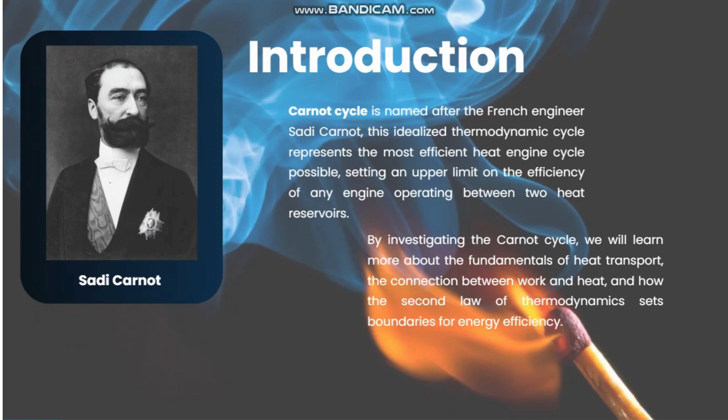Introduction. Carnot cycle is named after the French engineer Sadi Carnot. This idealized thermodynamic cycle represents the most efficient heat engine cycle possible, setting an upper limit on the efficiency of any engine operating between two heat reservoirs. By investigating the Carnot cycle, we will learn more about fundamentals of heat transport, the connection between work and heat, and how the second law of thermodynamics sets boundaries for energy efficiency.

The Carnot cycle represents the most efficient heat engine cycle possible. It sets an upper limit of efficiency for any engine working between two heat reservoirs. This idealized cycle helps us understand heat transfer, work and heat conversion, and how the second law of thermodynamics limits energy efficiency. By studying the Carnot cycle, we learn the boundaries of what is physically possible in thermodynamic systems and how to design more efficient engines.

Now let's discuss the Carnot cycle. It is an ideal heat engine cycle that consists of 4 steps: 2 isothermal (constant temperature) and 2 adiabatic (no heat exchange) processes. The steps in the PV diagram: the first one is isothermal expansion, 1 to 2. The gas expands slowly at a high temperature, T1, absorbing heat from the hot reservoir. The volume increases, the pressure decreases, and heat is added, Q1.

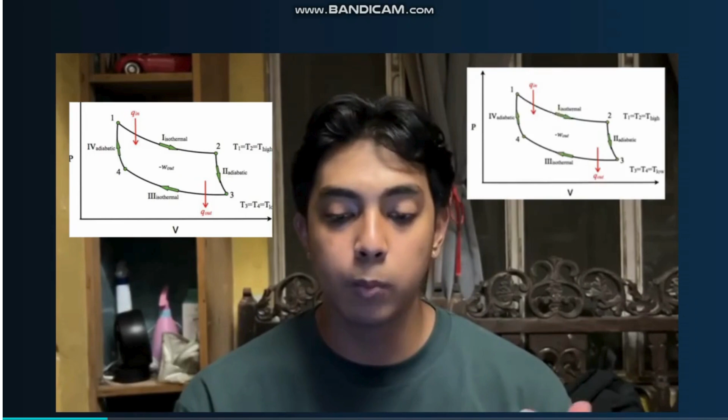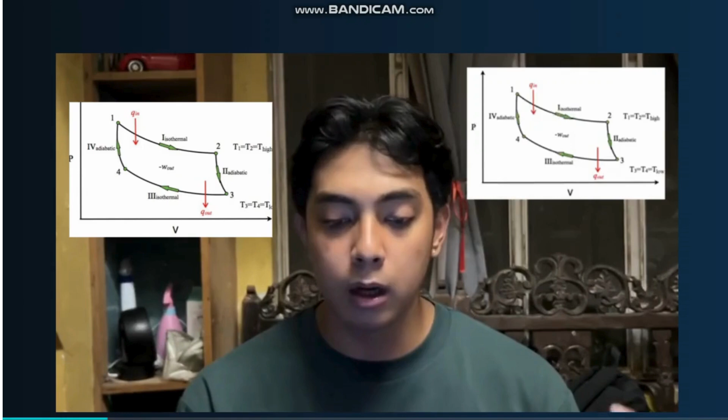Last, adiabatic compression, 4 to 1. The gas is compressed further without any heat exchange, bringing it back to its original state. The temperature rises, the volume decreases, and the pressure increases. The area enclosed in the loop is the net work done by the engine. The Carnot cycle is reversible and represents the maximum possible efficiency for a heat engine.

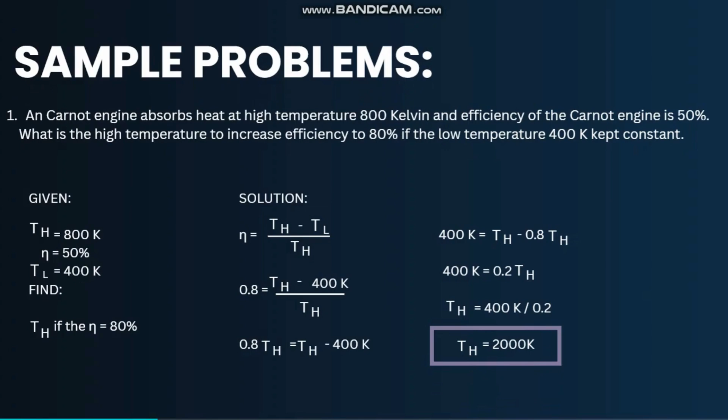We have sample problem number 1. A Carnot engine absorbs heat at high temperature, 800 Kelvin, and the efficiency of the Carnot engine is 50%. What is the high temperature to increase efficiency to 80% if the low temperature, 400 Kelvin, is kept constant? So the given here, we have high temperature, which is 800 Kelvin, an efficiency of 50%, and lastly a low temperature of 400 Kelvin. So how do we find the high temperature to increase efficiency to 80%?

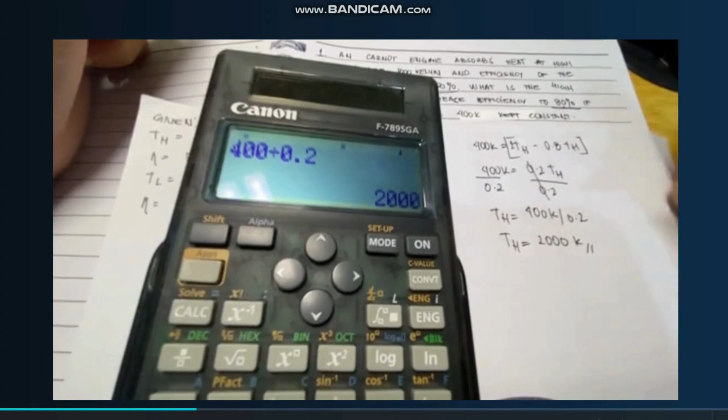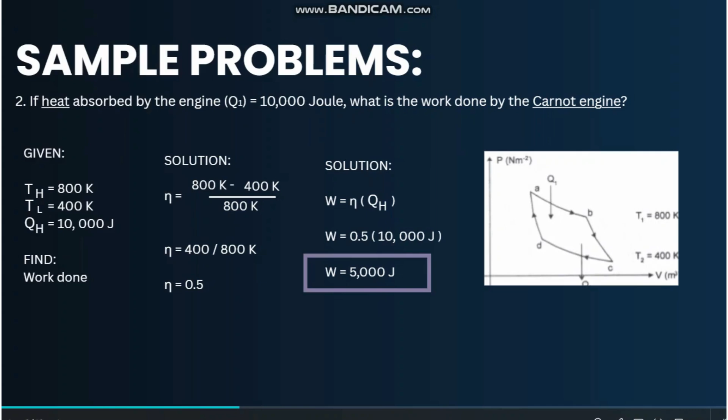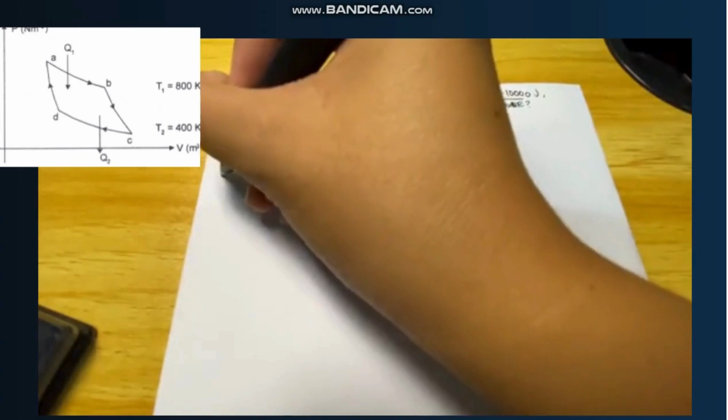Sample problem number 2. In this figure, if the heat absorbed by the engine is 10,000 joule, what is the work done by the Carnot engine? So we have given high temperature, which is 800K, and low temperature na 400K, and the heat transfer, which is 10,000 joule. So find the work done by the Carnot engine, W.

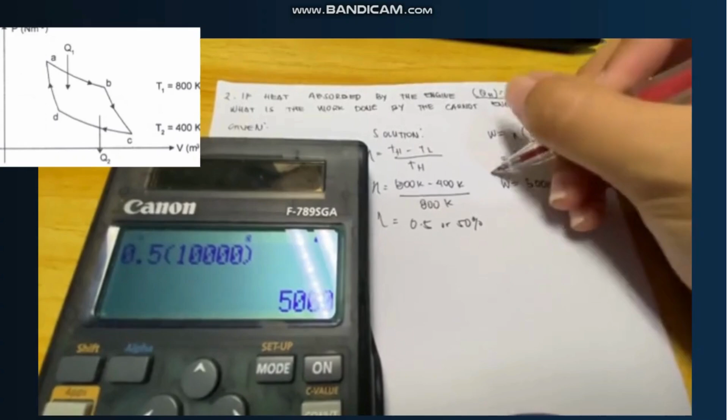So, let's calculate. So, meron tayo ngayon 5,000 joule. So, the final answer is 5,000 joule. This is the work done by the Carnot engine.

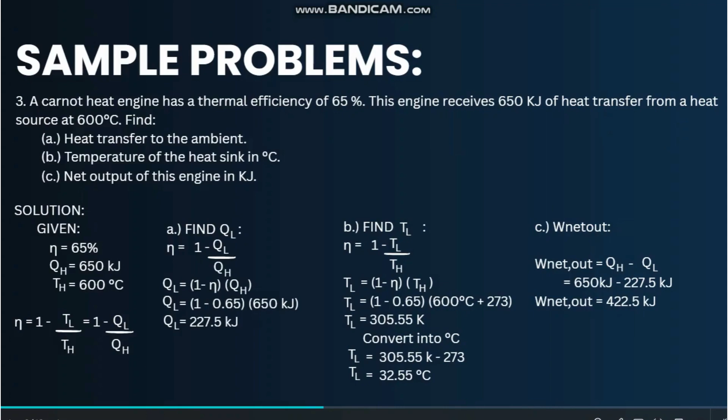Sample problem number 3. A Carnot heat engine has a thermal efficiency of 65%. This engine receives 650 kilojoules of heat transfer from a heat source at 600 degrees Celsius. So find letter A, heat transfer to the ambient, B, temperature of the heat sink in degrees Celsius, and letter C, net output of this engine in kilojoules.

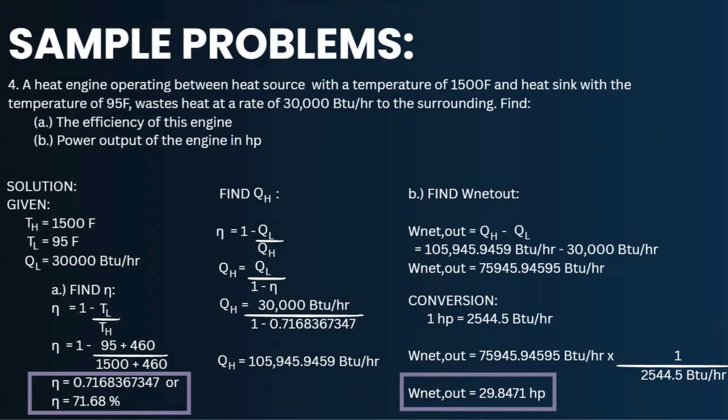Problem number 4. A heat engine operating between heat source with a temperature of 1500 Fahrenheit and heat sink with a temperature of 95 Fahrenheit wastes heat at a rate of 30,000 BTU per hour to the surrounding. Find letter A, efficiency of this engine, and letter B, power output of the engine in horsepower.

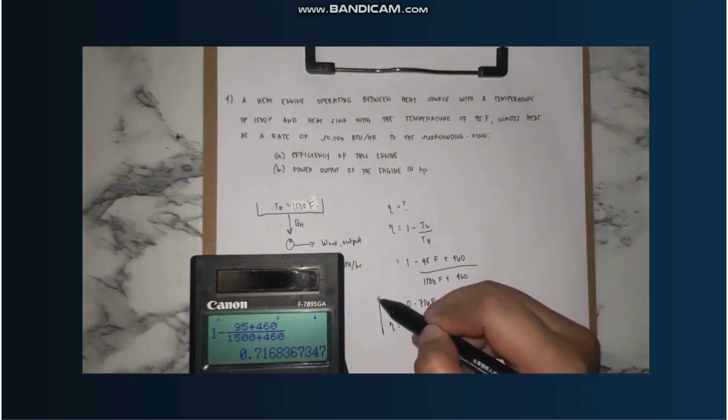So, calculator lang natin. 1 minus 95 plus 460 over 1,500 plus 460. So, yung makuha nating sagot ay 0.7168, pag 4 decimal na lang tayo, 0.7168 or 71.68%. So, yun. Nakuha na natin yung efficiency ng engine.

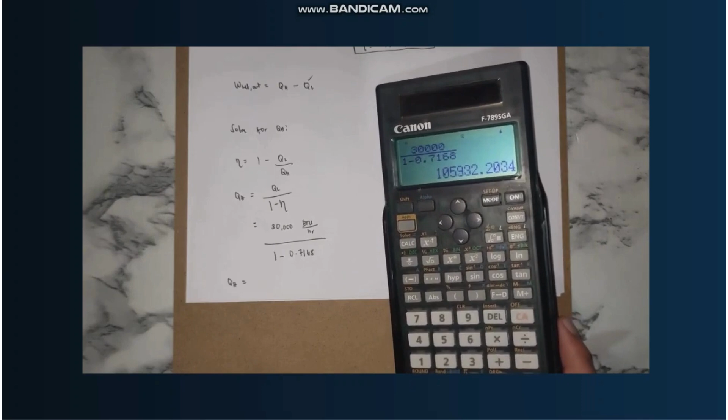So, yung makuha natin QH, calculate lang natin: 30,000 over 1 minus 0.7168. Makukuha nating sagot ay 105,932.2034. So, naka-BTU per hour pa to.

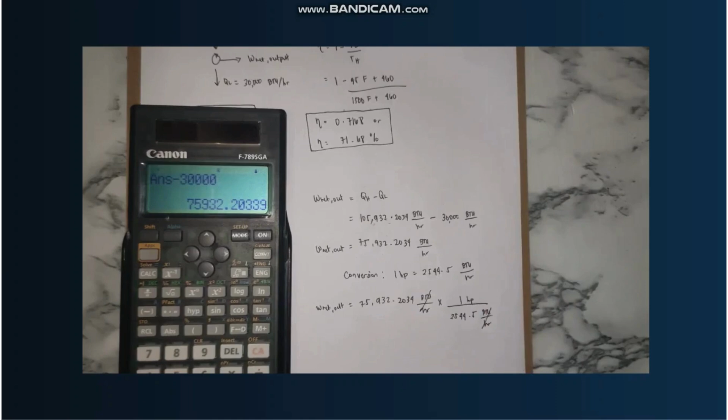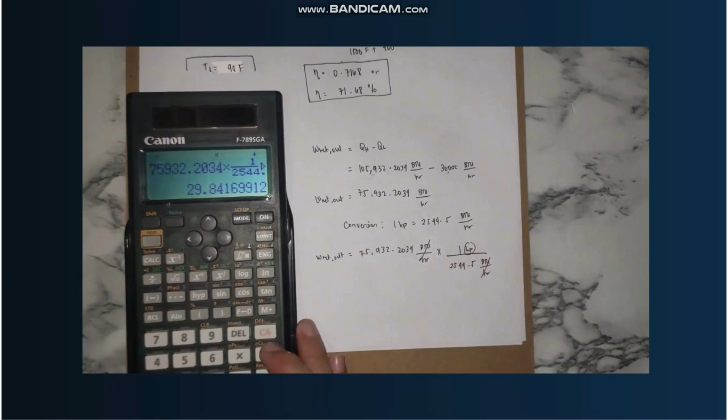So, calculator ulit natin. 75,932.2034 times 1 over 2,544.5. So, yung makuha nating sagot ay 29.8417, in HP na siya.

Now let's move to the sample number 5. An engine following the Carnot cycle produces power of 90,000 kilowatts. Find the rate at which heat is absorbed into the system from the hot reservoir and leaves the system in the cold reservoir for an engine operating between the reservoirs at 750 Kelvin and 300 Kelvin. So, given natin, temperature high na 750 Kelvin, and then ang temperature low natin na 300 Kelvin. Given din ang work net na 90,000 kilowatts.

Hinahanap dito yung heat absorbed into the system from the hot reservoir na Q in, and then yung heat that leaves the system in the cold reservoir na Q out. So, find Q in, and then Q out.

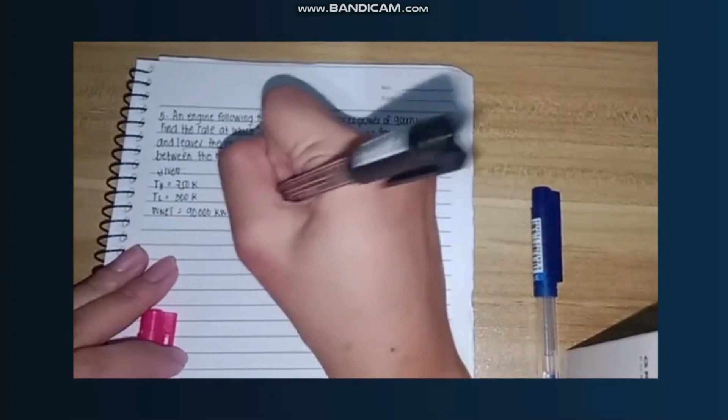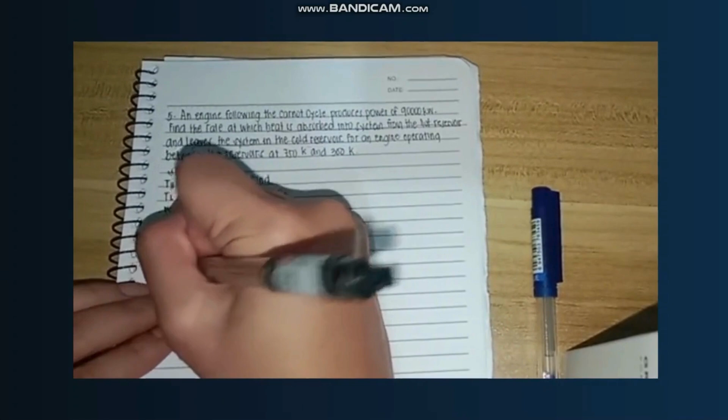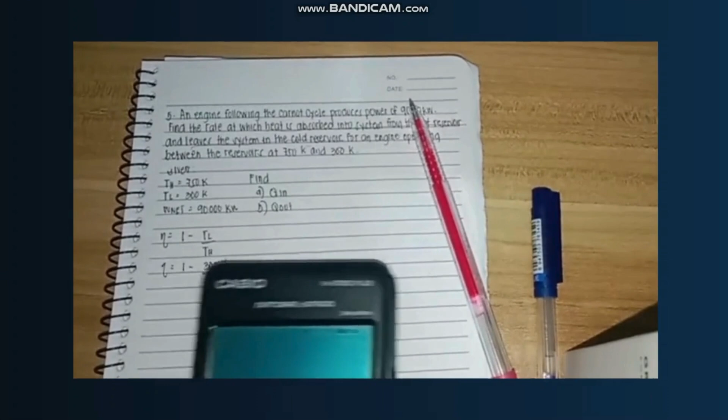First, solve natin yung efficiency. So, the formula for efficiency is 1 minus TL over TH. Given naman yung TL and TH. So, substitute the value. Efficiency, 1 minus 300 Kelvin over 750 Kelvin. So, cancel the unit. Solve natin siya. 1 minus 300 over 750. So, nakuha nating efficiency is 0.6 or 60%.

So, next, kuhanin naman natin yung Q in by using the formula of efficiency na work net over Q in. So, derive natin yung formula. Q in is equal to work net over efficiency.

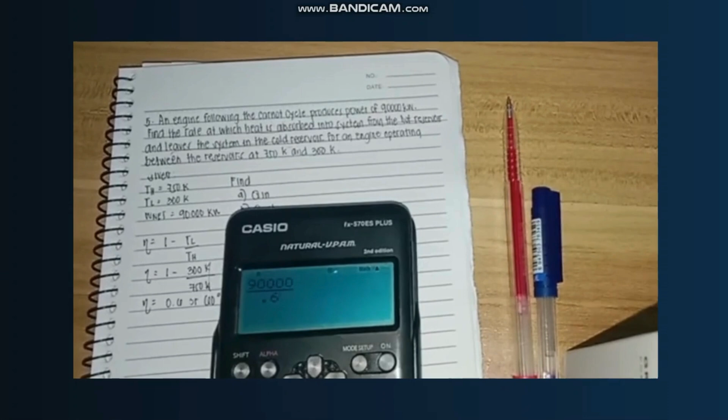Given yung value ng work net na 90,000 kilowatts, and then yung efficiency na nakuha natin kanina. So, substitute the value, 90,000 kilowatts, and then 0.60. So, solve natin, makukuha na natin yung Q in. 90,000 over 0.6. So, ang value ng Q in natin is 150,000 kilowatts.

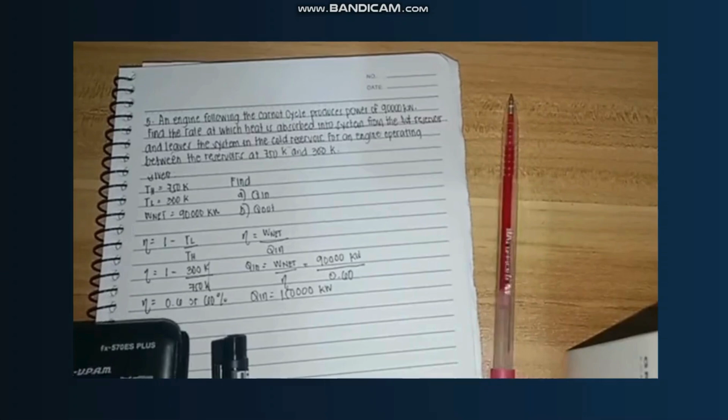So, final answer for Q in. And then next, let's solve for the Q out by using the same formula ng efficiency. Efficiency is equal to work net, diba, over Q in. The formula for work net is Q in minus Q out over Q in pa rin. So, ayan yung expanded equation for efficiency. So since may Q in tayo parehas, meaning 1 na lang siya.

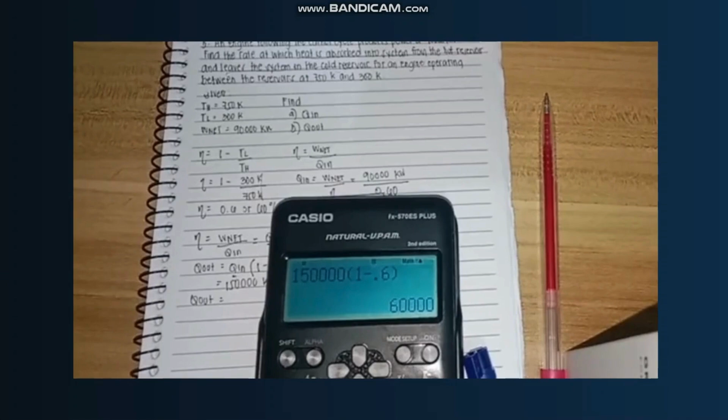So the formula for Q out is equal to Q in times quantity of 1 minus efficiency. So since nakuha na natin yung value for Q in, and then meron na rin tayong efficiency, substitute the value. So Q in natin is 150,000 kilowatts times 1 minus 0.6. So solve natin yung Q out. So ang value ng Q out natin is 60,000 kilowatts. So, kuha na natin yung parehas na hinahanap na value, Q in and Q out.

Now, let's move to sample number 6. A Carnot heat pump operates between a cold reservoir at 270 Kelvin and a warm room at 300 Kelvin. If the pump consumes 2 kilowatts of power, how much heat does it deliver to the room per second? So, sulat muna natin yung given. Given na temperature high na 300 Kelvin, and then temperature low na 270 Kelvin. And then given din yung work net natin na 2 kilowatts.

So, first, solve natin yung coefficient of performance ng heat pump. The formula for COP ng heat pump is TH over TH minus TL. Substitute natin yung mga value, since given naman na lahat. TH natin is 300 Kelvin over 300 Kelvin minus 270 Kelvin. Cancel natin yung mga unit since walang unit yung COP natin. 300 over 300 minus 270. So, ang COP natin is 10.

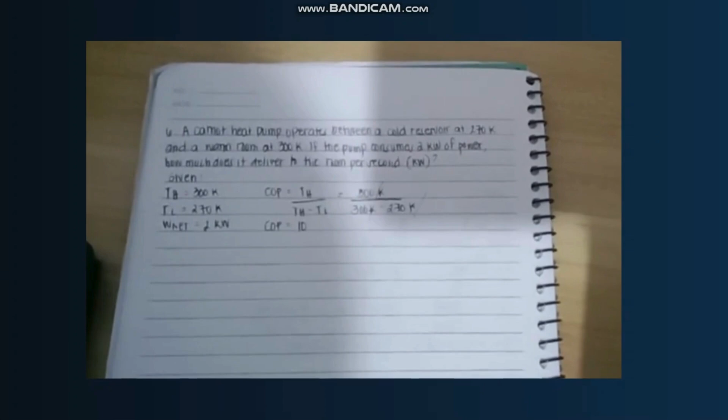Next, solve na natin yung QH natin or the heat delivered to the room. Gamitin muna natin yung formula ng work net. Work net is equal to QH, yung heat delivered, over COP. Derive natin yung formula. So, QH is equal to work net times COP. Since given na yung mga value, substitute na lang natin. Work net natin is 2 kilowatts, then yung COP natin na 10.

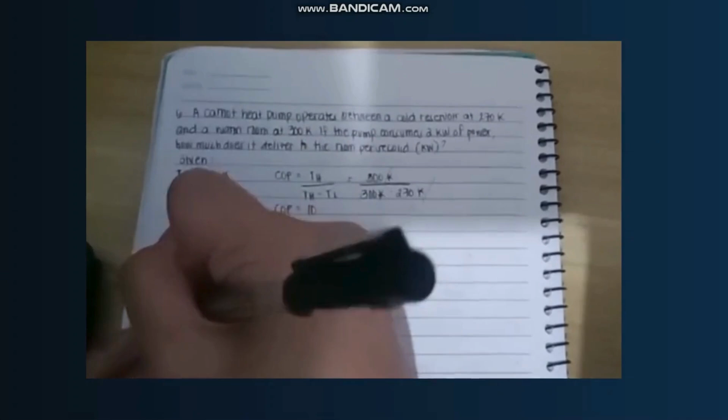So, makukuha na natin yung hinahanap na QH. So, 2 times 10. Pwede mo na i-calculate. So, ang QH natin is 20 kilowatts. So, the final answer, yung nahanap natin na QH, is 20 kilowatts.

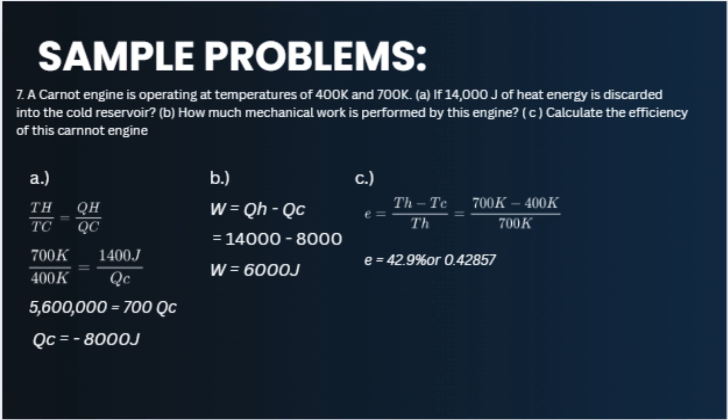A Carnot engine is operating at temperatures of 400 Kelvin and 700 Kelvin. If 14,000 joules of heat energy is discarded into the cold reservoir, how much mechanical work is performed by this engine? Calculate the efficiency of this Carnot engine. First, we're going to draw a sample of the engine. This is the hot temperature of 700 Kelvin, and this is the cold temperature of 400 Kelvin.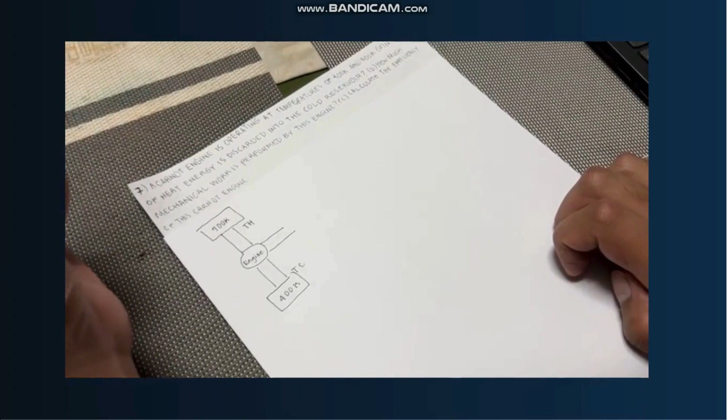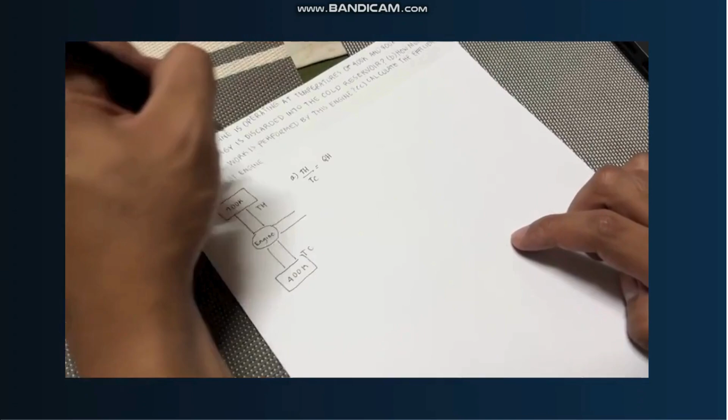And then, we're going to find the heat discarded into the cold reservoir. First, we're going to write the formula: TH over TC is equal to QH over QC. Then we substitute its values. 700 Kelvin over 400 Kelvin is equal to 14,000 joules over QC. Then we use cross multiplication and multiply its value, and the answer will be 5.6 million.

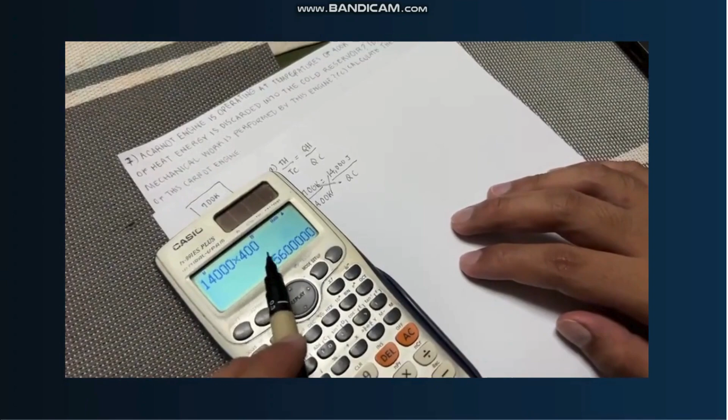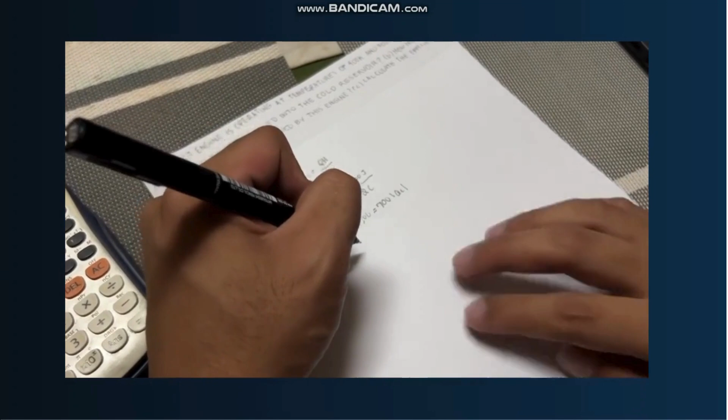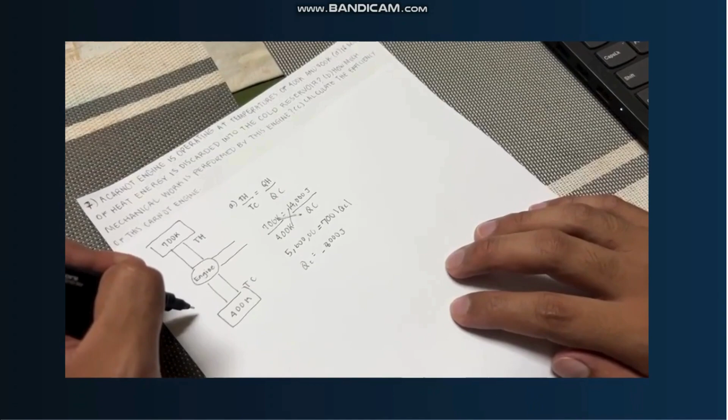Is equal to 700 QC. Then the value for QC will be negative 8,000 joules. We divide 5,600,000 by 700. This is the value for the cold reservoir, that's why it is negative.

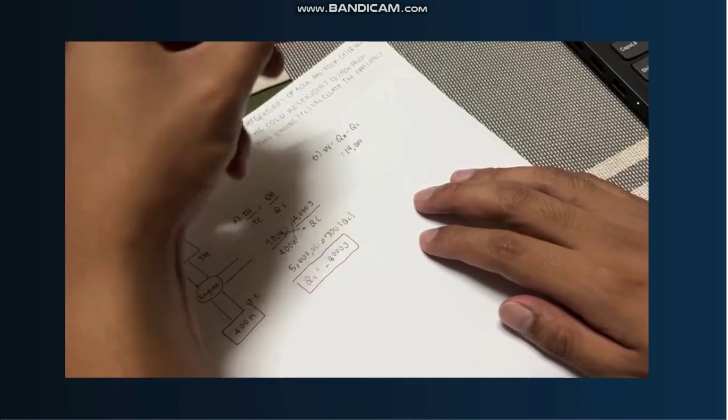Next question is, how much mechanical work is performed by this engine? The formula for mechanical work is W is equal to QH minus QC. Then substitute its values: 14,000 minus 8,000. Then subtract it, and the value will be 6,000 joules for mechanical work.

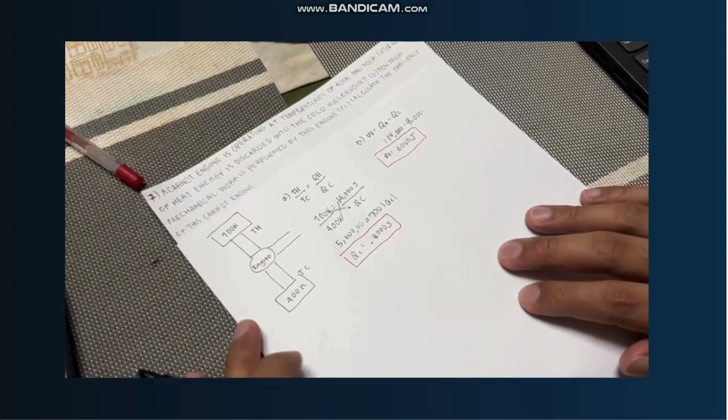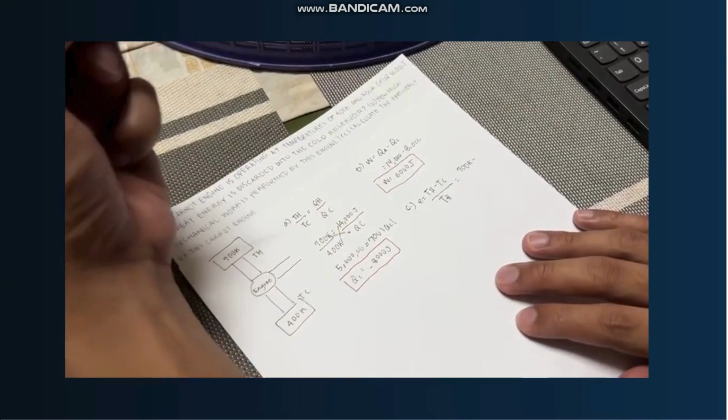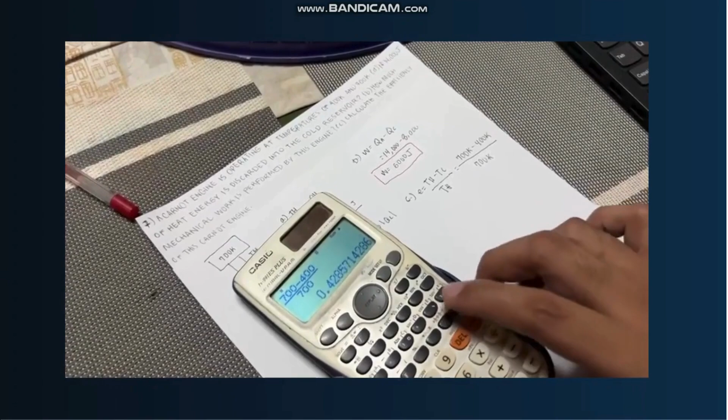Then lastly, calculate the efficiency of this Carnot engine. We're going to use the formula for efficiency. The efficiency is equal to TH minus TC over TH. Then substitute its value: 700 Kelvin minus 400 Kelvin over 700 Kelvin. 700 minus 400 over 700. Then the answer will be 0.42857 or 42.9%.